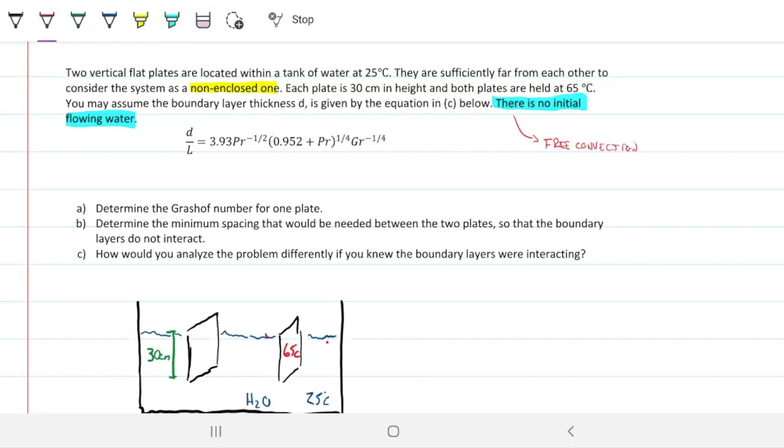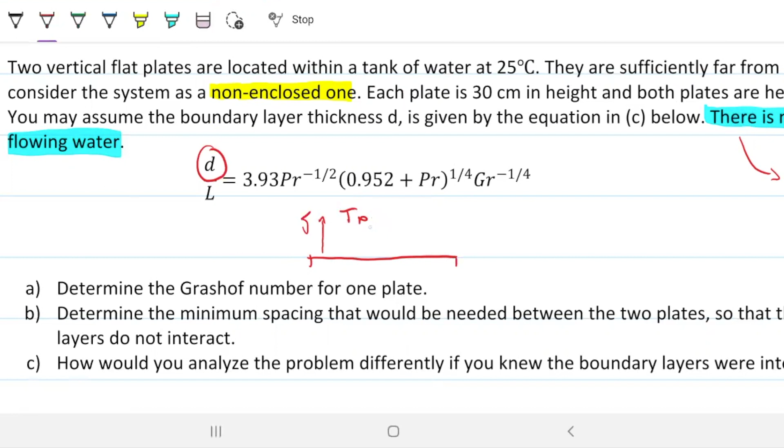Okay, so we have a little equation there. What is this equation saying? It's saying that the distance of the boundary layer, so remember the boundary layer, so if I have a flat plate like so, our boundary layer will have a certain distance from here. Remember the definition of the boundary layer, where the temperature is 99% that of T infinity. So that D there is this distance, the distance from the hot surface or the cold surface to the boundary layer.

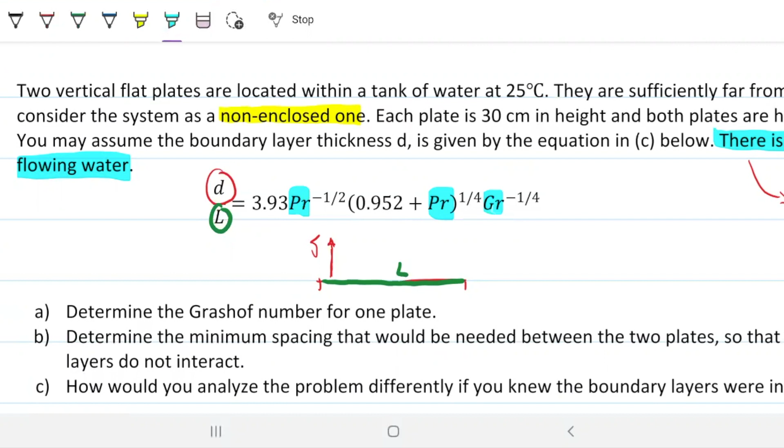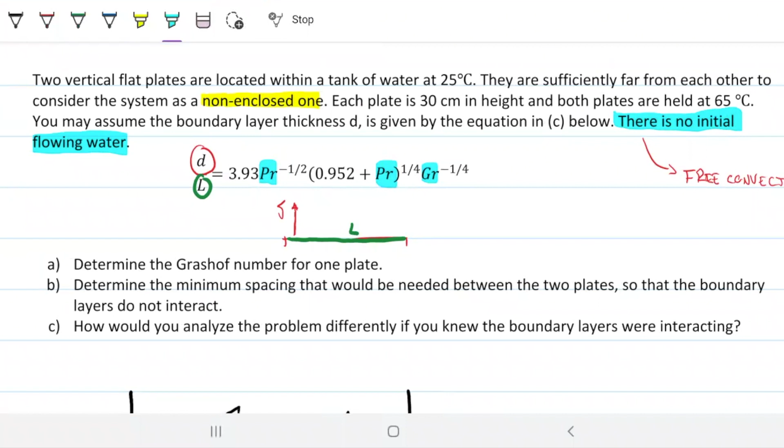Then L is our characteristic length. In this case here, it is the length of the plate, L. Then we have Prandtl, our old friend Prandtl, and Grashof, our new friend Grashof. So we can calculate the distance of that boundary layer of this specific situation by relating Prandtl and Grashof. We are to determine Grashof number on one plate. It's easy enough. Determine the minimum spacing that would be needed for these two plates so that the boundary layers do not interact. And answer how we would analyze this problem differently if we knew the boundary layers were interacting.

Okay, so I drew my beautiful drawing here with a tank of water. And inside the tank of water, I have my two vertical plates, both plates at 65 Celsius. And we know that because the water is at 25 and the plate is at 65, there will be energy flowing from the plates to the water.

Okay, so let's just do a little thought experiment. Let's just draw a Q to simplify this. That's why I had the Qs there before. Let's say my boundary layer goes all the way to the tip of this arrow here for the right hand plate, and for the left hand plate goes to like so. If the boundary layers quote unquote touch each other, then by definition we don't have a non-enclosed space anymore, right?

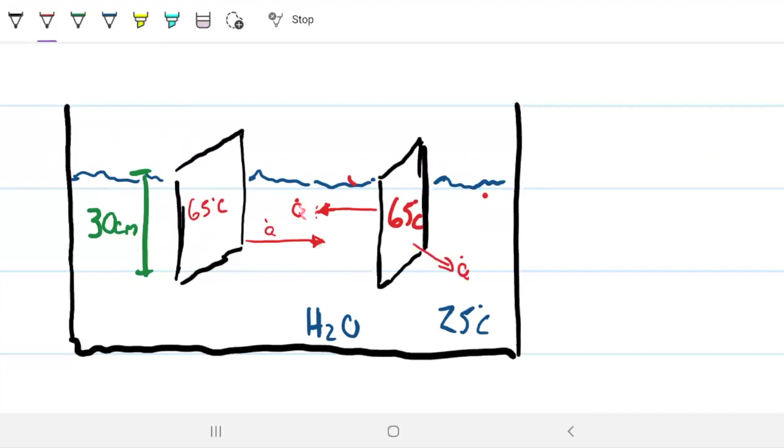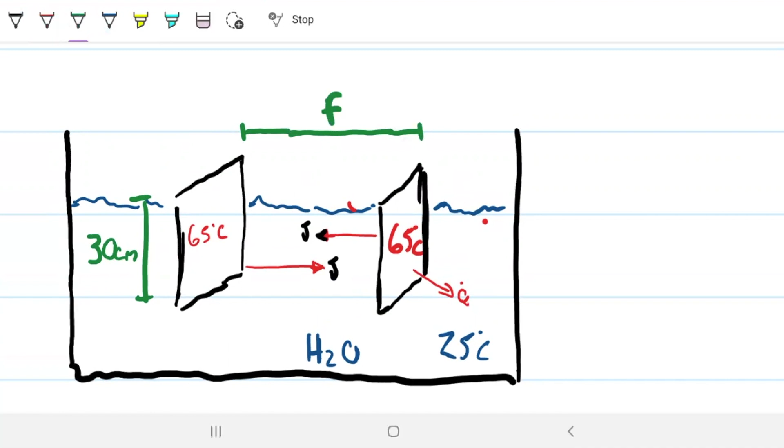And the question is asking us what has to be the D. So let's actually change this to the more appropriate letter, which is delta. What has to be the delta of these plates so that these guys do not touch? What is the minimum spacing? Let's call it F, just to have another letter. What's the minimum distance between these two, F, so that they are not touching each other?

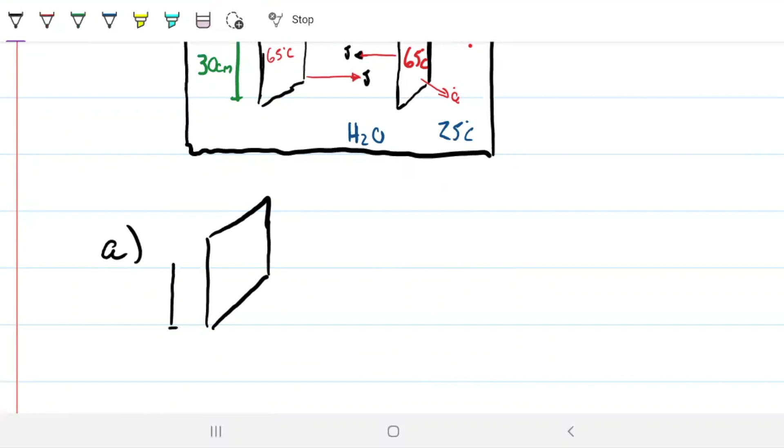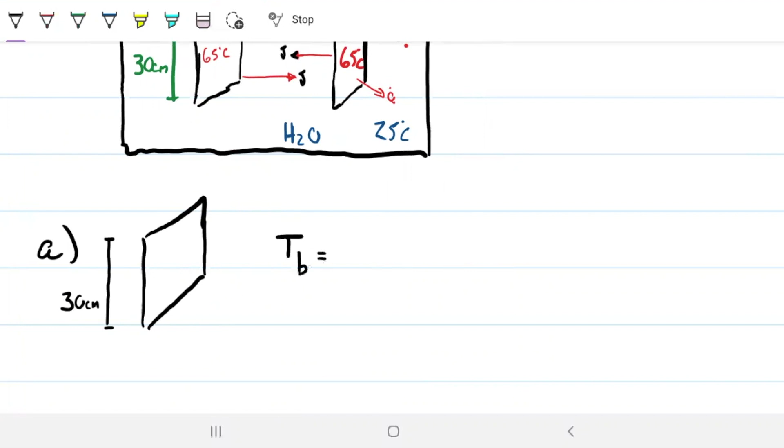Okay, starting off with Grashof number for one plate. We only have one plate. It's at 65. It has 30 centimeters in height, which is the characteristic length of a plate. And our film temperature is 25 plus 65 over 2, right, which is 90 over 2, which is 45 Celsius.

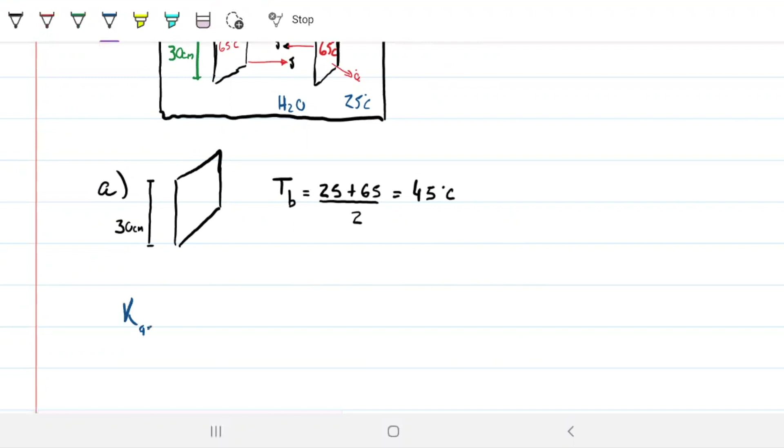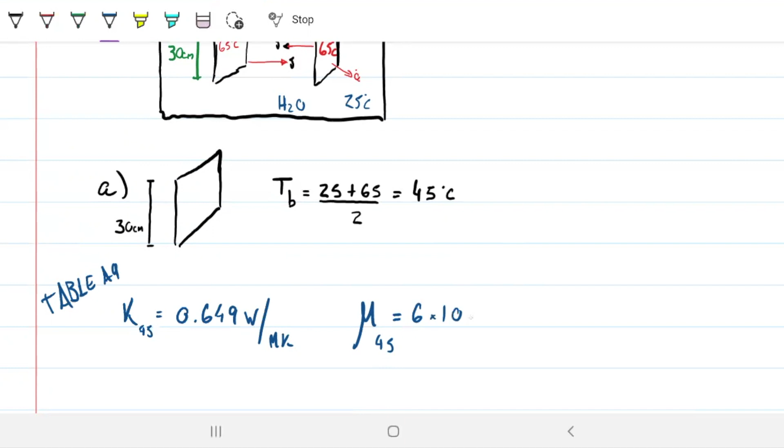Okay, so I'm grabbing the properties. As per usual, I'm grabbing the properties at 45. So let's go ahead and write down the properties. K at 45, this is for water, okay? So this is table A9, as opposed to A5. 0.649 watts per meter Kelvin. This guy, 6 times 10 to the minus 4 kilograms per meter second. Prandtl, old friend Prandtl, is 3.9123.

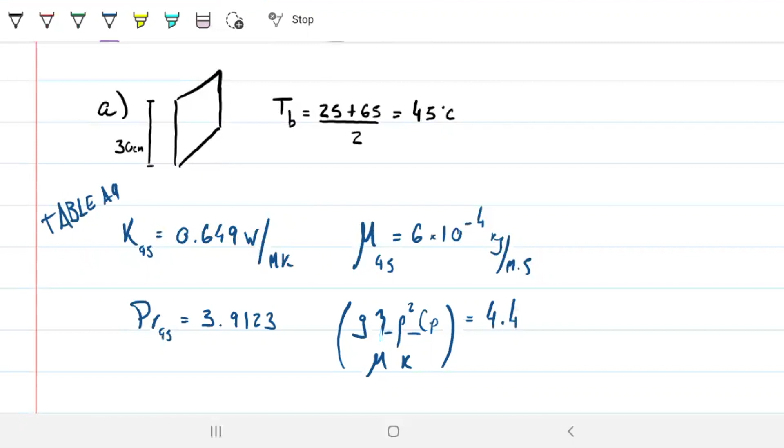And our new friend, the thing, which is this big chunk here, CP divided by conductivity, is 4.4 times 10 to the 10. Again, I didn't do any math, okay? This is the way it is shown in the table.

We need to calculate Grashof. Well, we have a fluid, we have water, right? We don't have an ideal gas, we have liquid. So if we go ahead and do beta equals 1 over 45 plus 273 to have it in Kelvin, that won't work. That's tempting, but you can't do that. And that's exactly why we have this guy here, so that we can find our Grashof without relying on that beta there.

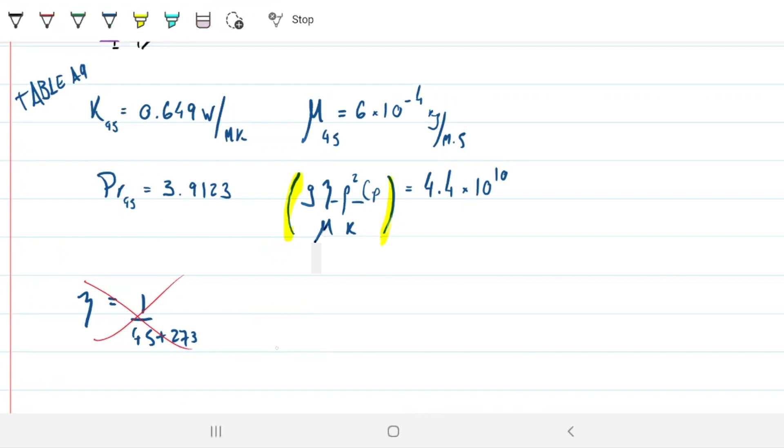So Grashof, if you guys recall, actually, let me do it differently. Grashof equals our big friend. Let me call this guy theta. Equals theta times our characteristic length to the third times delta T divided by Prandtl.

Right? And that comes again from the table. You can check on your table, table A9, on the right, on the header of the table. Okay, so that means that if I multiply what I have for theta, which I already have, this number here, by my characteristic length, which is 0.3 cubed, times delta T divided by Prandtl, I should get my Grashof, which is part A of the problem.

Okay, so 4.4 times 10 to the 10, 0.3 to the third. Delta T is, what is it? 65 and 25. 65 minus 25, so that's 40, divided by my Prandtl, which is 3.9123. So Grashof is 1.23 times 10 to the 10.

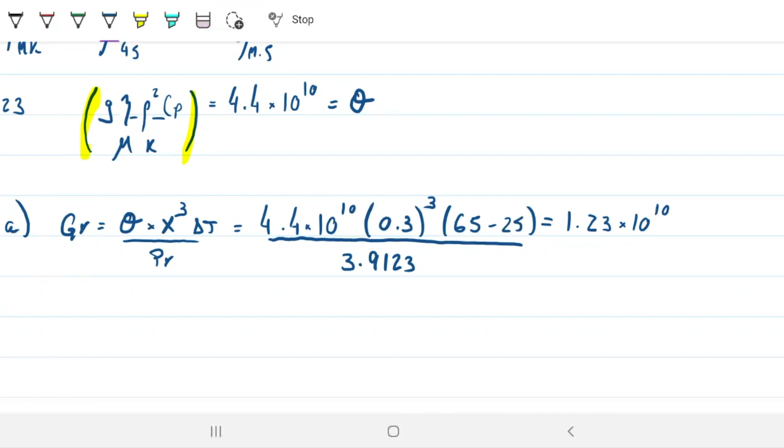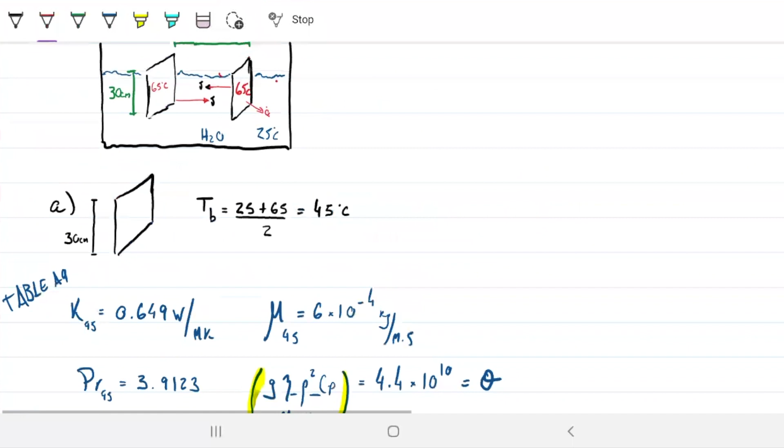Okay, double check your math. Back me up, please. So that's part A. So that's one of the answers we're looking for. Cool. Next part. What is the distance, right? What is that distance F? That's what this part is asking us. This was Grashof number. Distance F: minimum spacing that we will need so that the boundary layers do not interact.

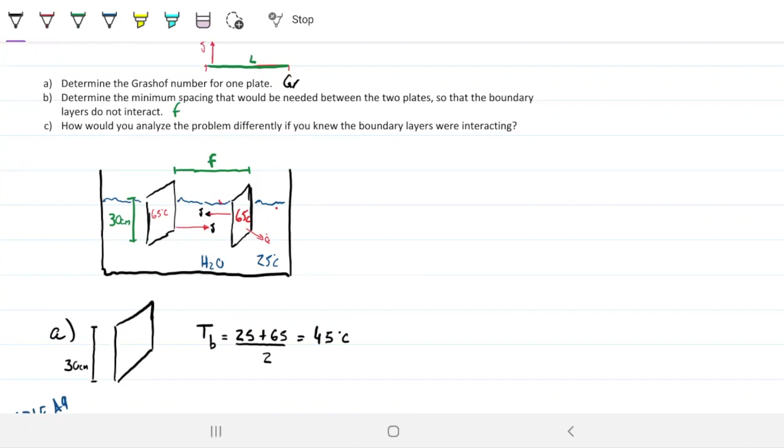So let's first find out what is the D, and I'm going to go ahead and call it delta, for each of these plates. Okay, so for that, I just need to literally plug in the equation. The equation is a very friendly equation. Let me see if I can do this. There you go. Just copy paste from the equation given in the question. Okay. So we have Prandtl, we have Grashof. We have both these things already. So if we're looking for this guy here, we just need to plug in the numbers, right?

So my delta divided by my length of the plate, which is 0.3 meters, equals, by the way, we actually need this number here so that we have a unit, right? Because if you think about it, all these guys here are non-dimensional. So if we didn't have this L, our distance delta would be non-dimensional, which wouldn't make sense. Okay, moving on.

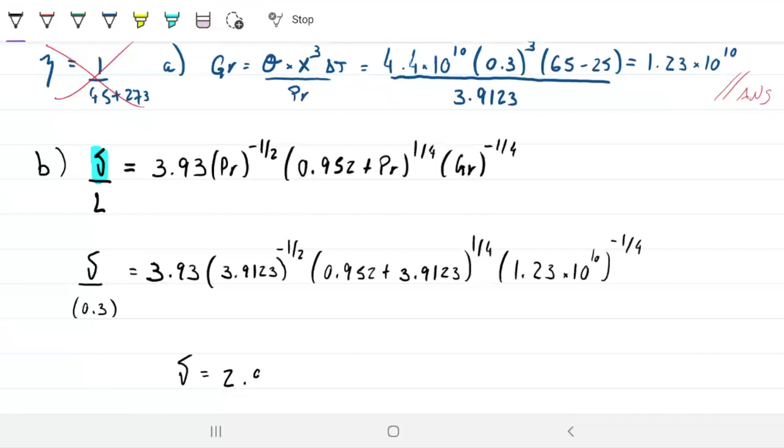3.93, Prandtl 3.9123 to the minus half or minus 0.5, 0.952 plus 3.9123, to the 1/4 or 0.25, and Grashof, big fellow, 1.23 times 10 to the 10, and that is to the negative 1/4. So that means that my delta in meters, because I put this guy in meters, is, what was it? 2.8 times 10 to the minus 3, which is obviously the same as 2.8 mils.

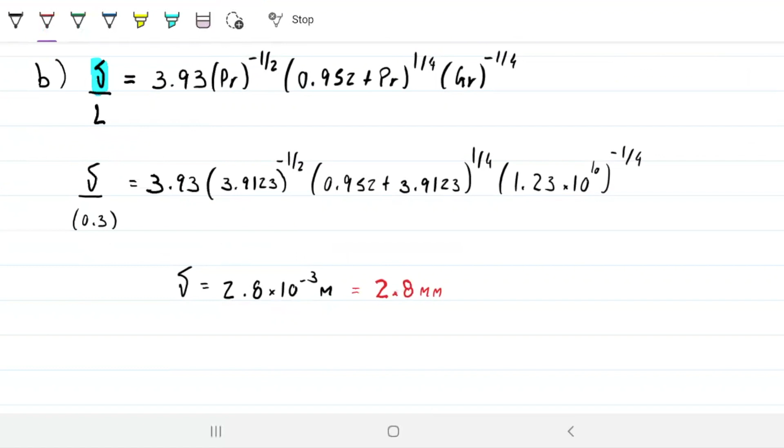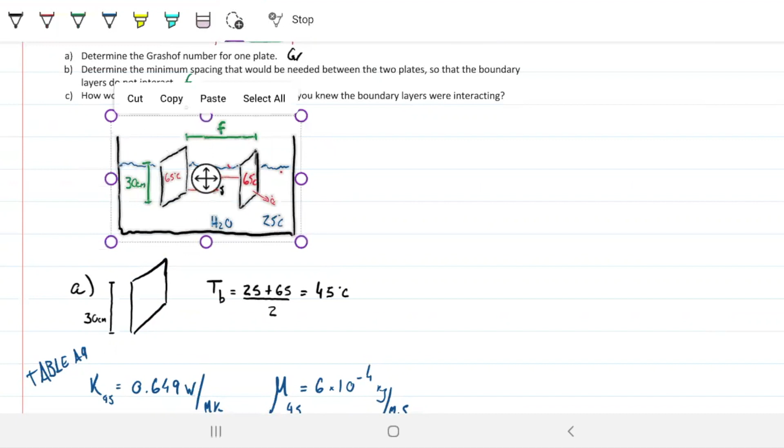Okay, so the answer is 2.8 mils. The question was, how far apart do we need to place these plates so that they do not interact? So let's grab our drawing and let's answer that question. Let me zoom in. What we're saying is that this distance here, shouldn't have deleted that. Just get rid of one of them. The distance of one of the plates is 2.8 mils.

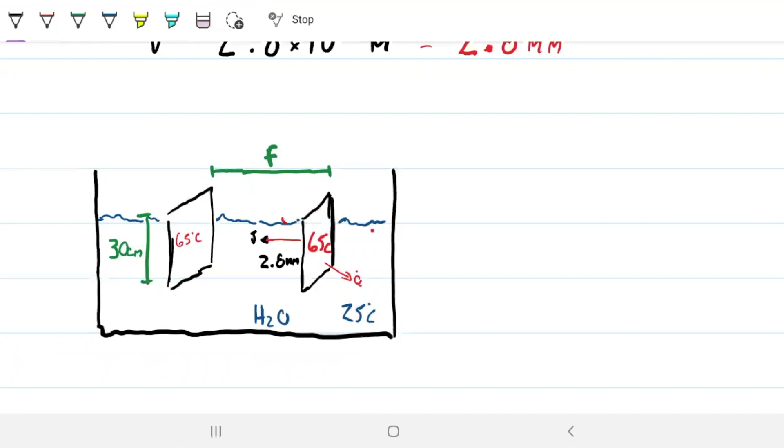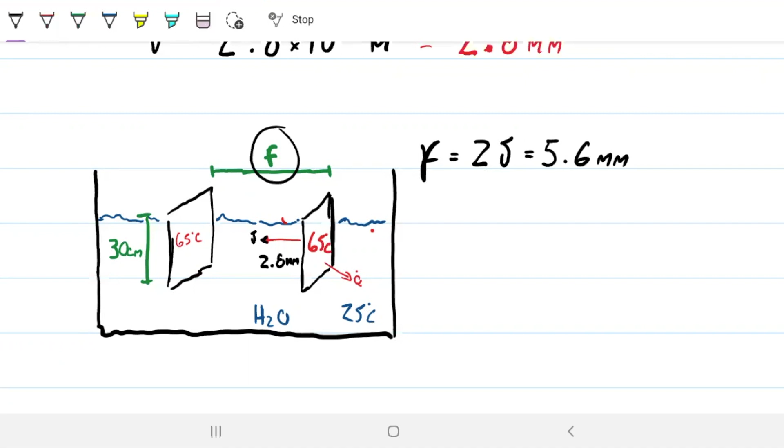Okay, so if we don't want the two plates to interact, then F will be just 2 times that, right? So F will be just 2 times the distance for them not to interact, which is 5.6. Right, so as long as they're 5.6 millimeters apart, the boundary layers should not interact, which would allow us to have a non-enclosed space interaction.

Right, now if we're actually designing this experiment and we are building this and we do these calculations, we know there's a lot of approximations involved and a lot of empirical relationships. So we'd probably play it safe and put them 10 mils apart, right? Because like in a lot of things in engineering, we use this to have a sense of direction, a sense of magnitude, and we know, okay, it's somewhere around 2.8 mils, the boundary layer for one of these plates.

So if I place them 10 mils apart, this would definitely be enough for the boundary layers not to interact. Of course, you might be constrained by budget and things like that, but it shouldn't be a problem. Okay, so B, the distance between the two for them not to interact has to be 5.6 mils at least. So probably write that, at least 5.6, right? And let's finish off with part C.

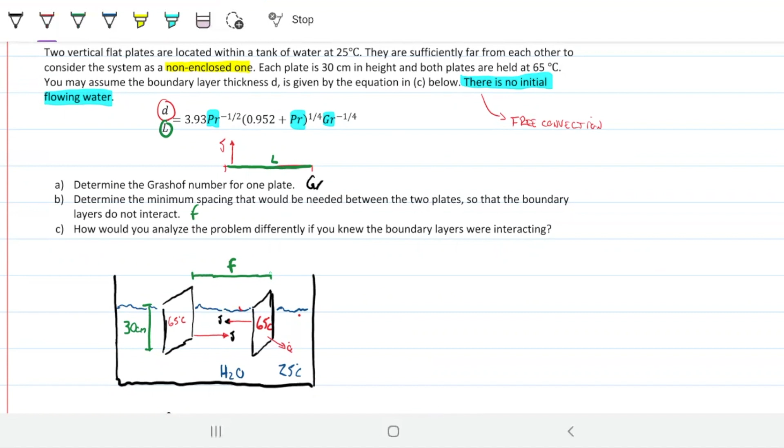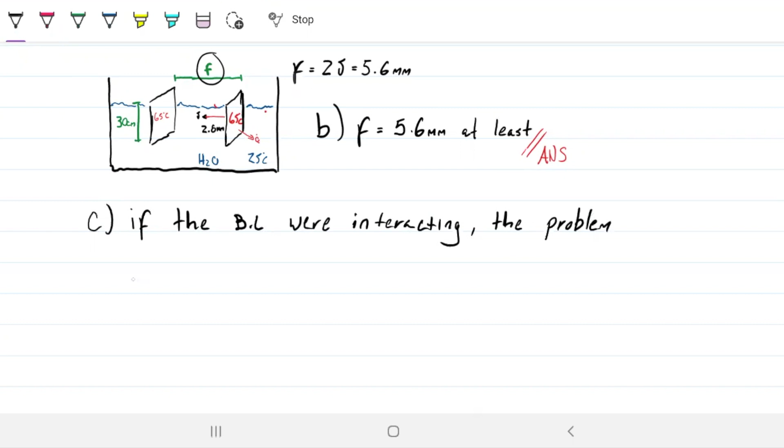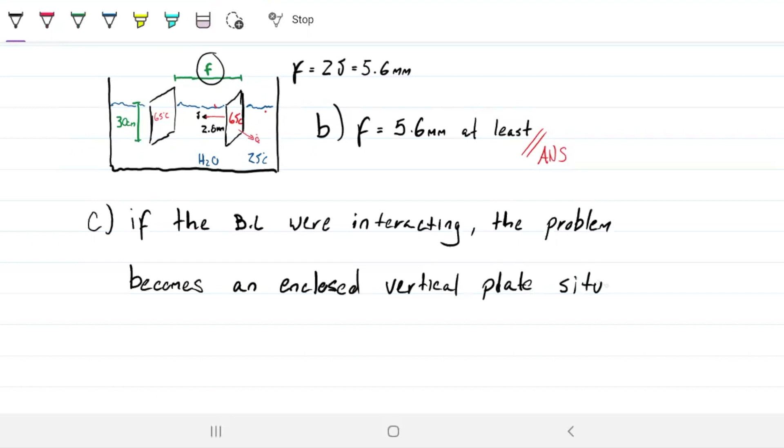Part C is asking us, how would you analyze this problem any differently if you knew the boundary layers were interacting? So let me go ahead and pause the video and wait for you guys to answer it. So let's go ahead and write it down. So, C: it becomes an enclosed vertical plate situation, and then we have to use the correlations accordingly. Right? So, questions from your